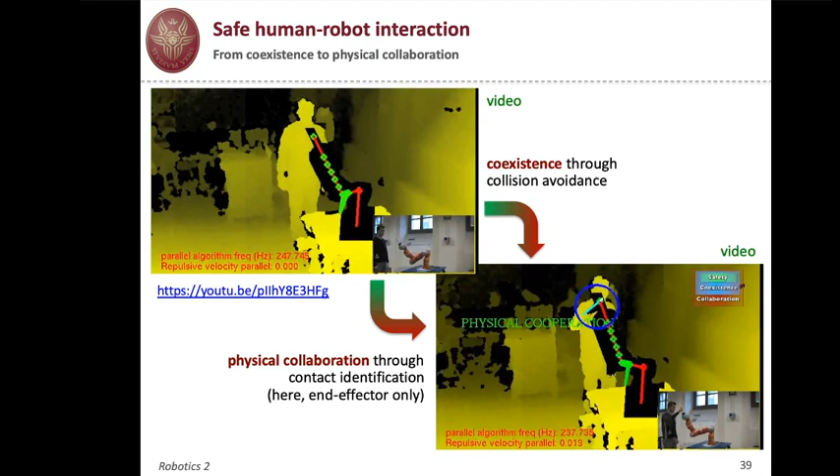As a matter of recap, let's look at these two short clips, which are taken from the IROS 2013 video. On the first one, we have the coexistence, so that we have no contact at all between the robot and the human. And coexistence means that we are able to achieve collision avoidance no matter how close we are to the robot. In the second video, instead, we have an explicit contact and we exchange forces at the end effector level.

We will see that in order to perform a useful collaboration, we have to identify the contact location and also estimate the force that occurs at the interaction point. So our goal in this second part of this lecture will be going through, first, detailing how the distance computation is done, and in particular, how this can be brought to the localization of the contact point.

So this is the procedure that has been made so far already. We start with a single depth image acquired by Kinect. We have seen that we can also use two depth images for a better collision avoidance, avoiding false obstacles and occlusion. But anyway, with the depth image, we remove the robot from the image to avoid estimating self-collisions, which are not there. And we do this by applying a special filter, which is freely available by the Technical University of Munich, starting from the CAD model of the robot itself.

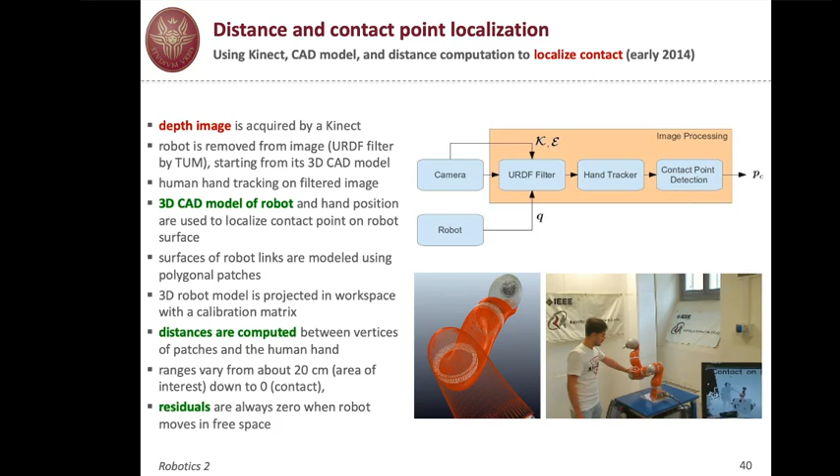And this computation is made from a distance which is about 20 centimeters, so this is the area of interest of proximity to the robot, down to 0 centimeters, which means that we have contact. During this free space motion, of course, the residual signals, those that are used for doing collision detection, will always be equal to 0. And here on the right-hand side, we see a surface patching of a CAD model. We see also the procedure done by the image processing to get the contact point detection.

Now, at this stage, we use internal and external information because we are getting closer, and the contact will be detected when the residual goes out of 0 or overcomes a threshold. At this point, the vertex from the surface of the robot, which is at minimum distance, will be taken as the contact point. And from there on, we can proceed for further estimation.

Now, in this video, you will see the algorithm applied to the left and right hand. They are colored with red and green, respectively, and so far with no other body parts. So you see the real image and the depth image. The left hand of Emanuele is touching close to the end effector, and now again with the left hand around the elbow. And now with the right hand, you see that all this occurs while the robot is moving.

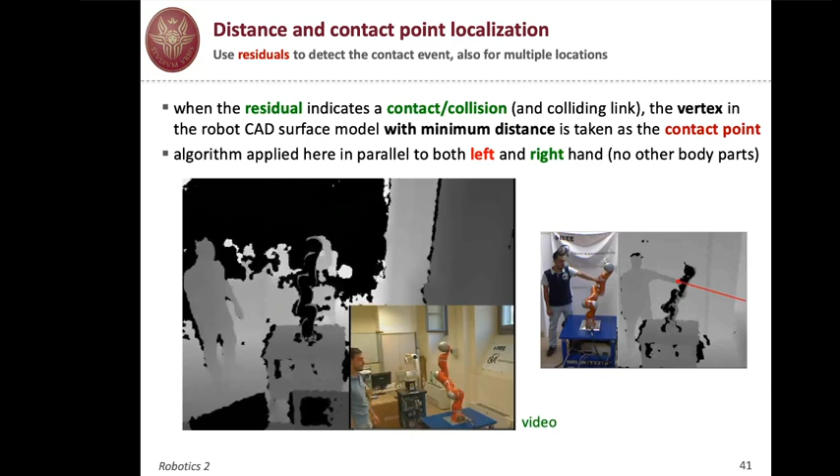So this is the first step. You need to know where you had contact. And in fact, you see that the images appear only when the hand is sufficiently close. Of course, you could do also double contact, and then you trace the hands as long as they remain within the 20 centimeters of distance.

Now, later on, we have also improved this first distance computation, which was limited only to the hands of the human, taking advantage of a framework, the CUDA framework, which is intended for parallel programming, so using GPUs in a massive way. In this case, we work with three depth images, so 2.5 dimensional images. The real one, which is captured by the sensor, in our case, a Kinect. The virtual one, the second figure in this slide, contains only the projection of the CAD model in the depth image. And finally, we do a subtraction, and the filtered depth image contains only obstacles.

At this stage, we can use parallel computation. So we compute distances between all points in the virtual image, so the ones that belong to the robot, and all obstacle points within the region of interest which are present in the filtered image. So we don't limit ourselves to the 2 points representing the hands. Because of this parallel computation, practically we need the same time to localize one contact point or even multiple contact points.

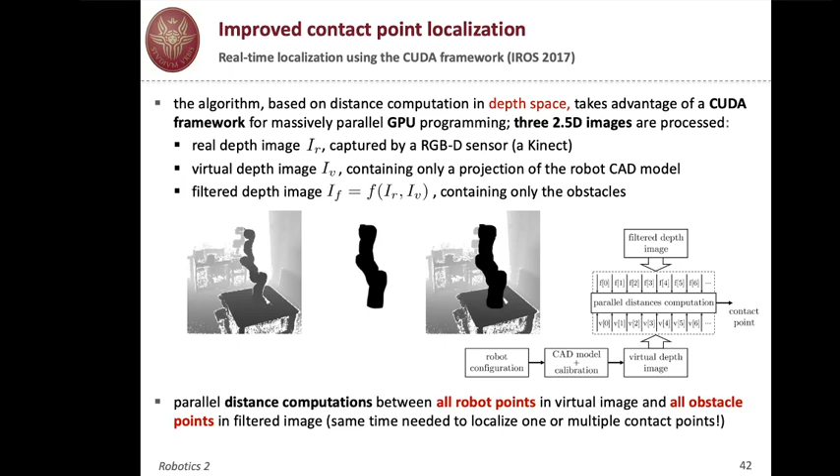But this was a later result. Now, in the first video that you will see, we have worked still with only the human hand contacts. Once you have localized where this contact point is, you may start wondering how you can estimate the contact force at that particular point.

And again, we are combining internal sensing information, or proprioceptive, and elaboration of that. In particular, in our case, we will use the residual vector and the external sensing coming from the monitoring system, in our case, 1 or 2 Kinect. So the task is the one that is realized. We localize in the least invasive way these points where the contact occurs. We give an estimation of the Cartesian forces that are being exchanged, initially probably 0 when we just touch the surface. And then we may use this information to control the robot reacting in some desired behavior.

That depends on the context, indeed. So the idea is to use the residual method to detect that the physical contact occurred. With monitoring the generalized momentum, we can also isolate which was the colliding link, and we have a filtered version of the joint torque associated to the external contact force. So far is what we have learned.

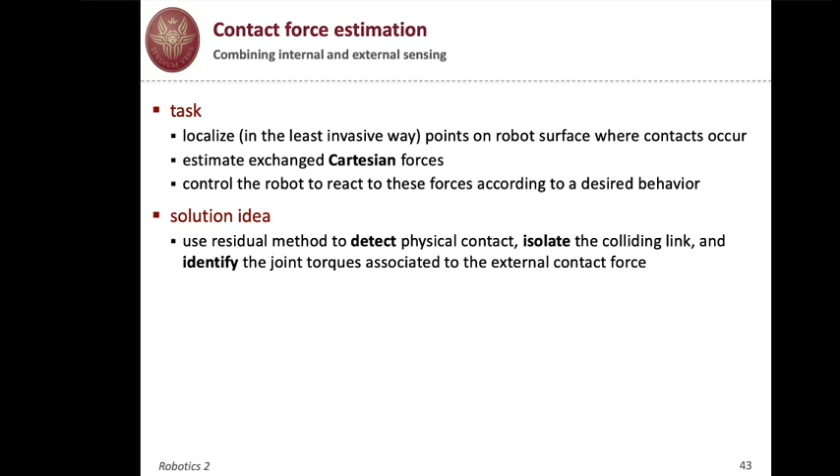Now, we have an additional part which comes from the external sensing. In fact, the depth sensor knows which human parts are in contact with the robot, and moreover, the most important thing, can localize the contact point on the robot structure. If we localize the contact point on the robot structure, then we can also compute analytically the Jacobian of this contact point, or area more in general.

So the estimation of the contact force goes through a simple solution of a linear set of equations, which are built substituting to the static transformation tau equal J transpose of the contact wrench, so forces and moments applied at the contact area, the resulting joint torque with the residual itself. In fact, we know that the residual is a first order filtered version of this. So we have this kind of equivalence. So we solve, in fact, J transpose gamma equal r.

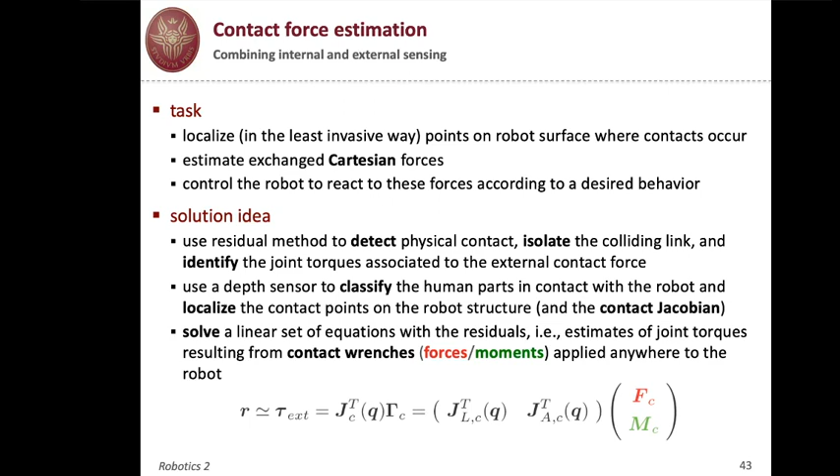Now, gamma is made by a linear force and an angular moment. And the Jacobian can be partitioned into the linear part, the top row of the Jacobian, and the angular part, the bottom row of the Jacobian. Since we are working with the transpose, of course, this becomes the first set of rows, the linear part, and the second set of rows of the transpose, the angular part. This is important to understand because what we will do now is to solve this type of equation. But in fact, this Jacobian may not be square. In fact, for the KUKA, it is a 6x7 matrix, and so the transpose is a 7x6.

But we made some simplifying assumptions, which are very realistic, in fact. When we are dealing with contacts, and in particular single contacts, so there's a single human part, which may be the hand, the finger, or an arm, the elbow, whatever, which goes into contact with the robot body. In this type of contact, which is almost pointwise, there is no transfer of important torque part. So the moment is really limited, okay? So there is a decision to be made. This small amount of moments, are we going to try to identify, to estimate also this part, or we make some simplifying assumption, we remove this from the picture, and then we may have a more reliable estimate of the

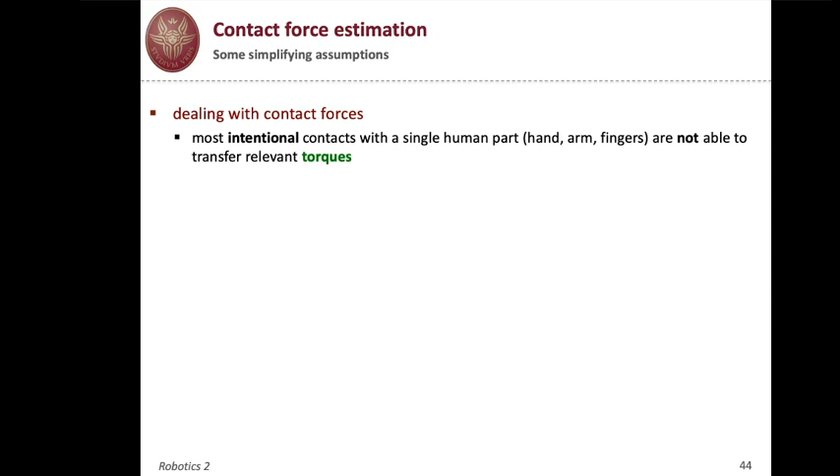contact force only. In fact, in order to get a good estimate of the wrench, gamma C, the Jacobian should have rank 6. So the robot should have at least 6 joints, which is true for the KUKA lightweight, by the way. But the point is that the contact should occur at the 6th or 7th link only. Because otherwise, the Jacobian would have some 0 columns, and therefore it could not reach the full rank required to estimate the full 6-dimensional wrench. So to make things much simpler and also more practical, we assume that there's no moment at the contact. So we consider only estimation of a pure Cartesian force Fc.

And at this stage, we just take the upper part of the Jacobian, so the linear part of the Jacobian, and we transpose this, which is in our case a 3x7 matrix. So the transpose is a 7x3, and we have a non-square matrix in this set of linear equations, and we solve for the estimate of the 3-dimensional force Fc using all information from the residual, which is, in our case, a 7-dimensional vector, okay?

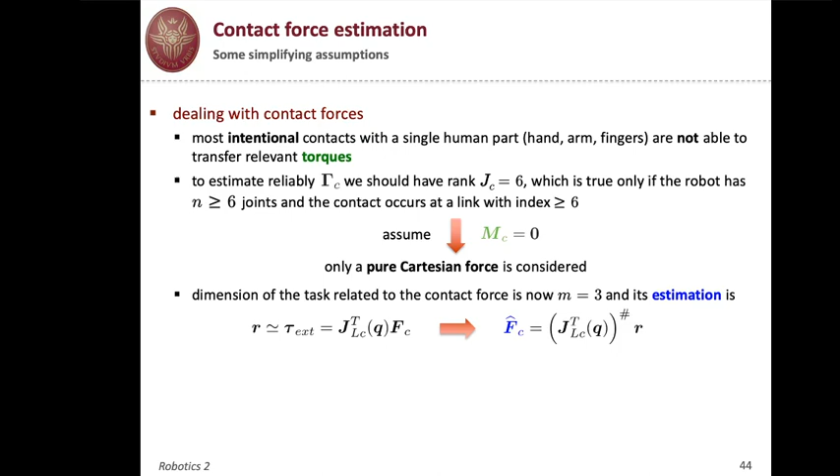So this is a minimum error solution indeed, because we may not have consistency of equations, but we can evaluate the quality of this estimation by making a number of tests. The contact Jacobian indeed is known once we have the information from the depth sensor. So we have all things in place, the residual and the contact Jacobian, to solve this pseudo-inverse and get an estimate f hat of the contact force.

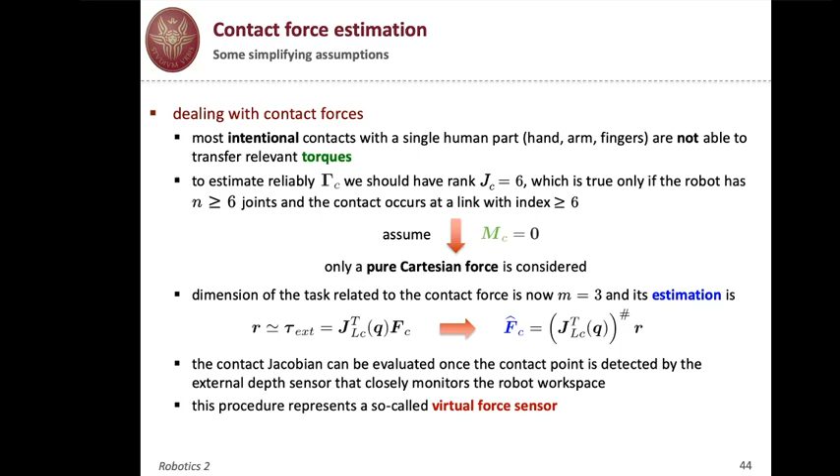Now, this whole procedure, since we have in no place an explicit measurement of this contact force, nor a tactile sensor, nor some force torque sensor in the vicinity, is in fact a pure virtual force sensor. So it's a procedure that replaces a physical sensor. Now, how can we validate what we get as an estimate? So let's consider back the full problem.

So with the Jacobian, which is considering both the linear and angular part, there's a mistake here. In fact, this should be the full wrench, not the pure force. But anyway, let's consider this as a full wrench in the first place, or a pure force when we reduce the estimation to the linear part. So how can you test this? You can use a force device for measuring an object. We decided to use a known mass located in a known position, like you see on the top image, which is now reported here in large.

So we have a known mass appended to the robot in a known position. We multiply the mass by the acceleration of gravity, and this gives the force applied to the structure. Now it's hanging. And we did this hanging it in two different places. So this is a static evaluation of our estimation. So the mass was 1.93 kilogram, which corresponds to a force of minus 18.93, applied either at link 4 in a known position on link 4 or in a known position at link 7.

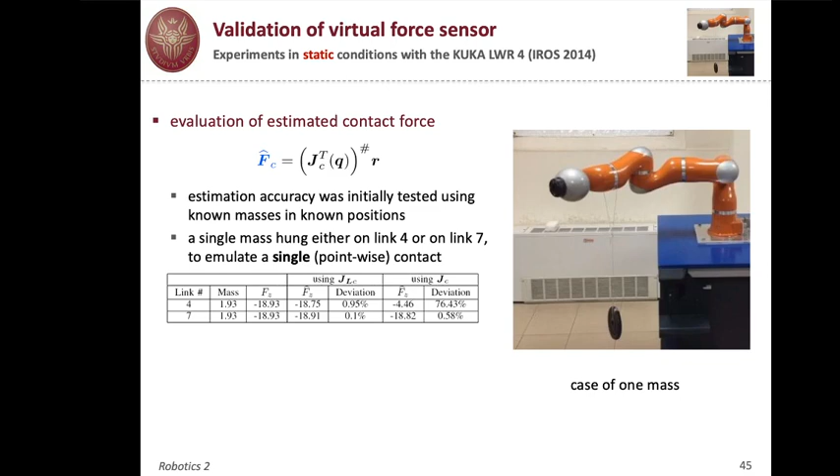We made also a second experiment. So we decided to hang first a mass on link 7 and then a second mass on link 4, so that we have a double contact estimation. And you see that using just the linear Jacobian for the two cases, we have reasonable results with a maximum deviation which is below 2.5%. And in the plot, you can see the evolution of the residual when we apply the first mass on link 7. You can see that there are the residual moving out of zero, and then when at the 5 second we are applying also the second mass, the residual changes further, and you see that the estimation of the force in the 2 points is kind of reliable. When you apply the second mass, in fact, you have also a slight variation of the estimation of the first one, so on link 7.

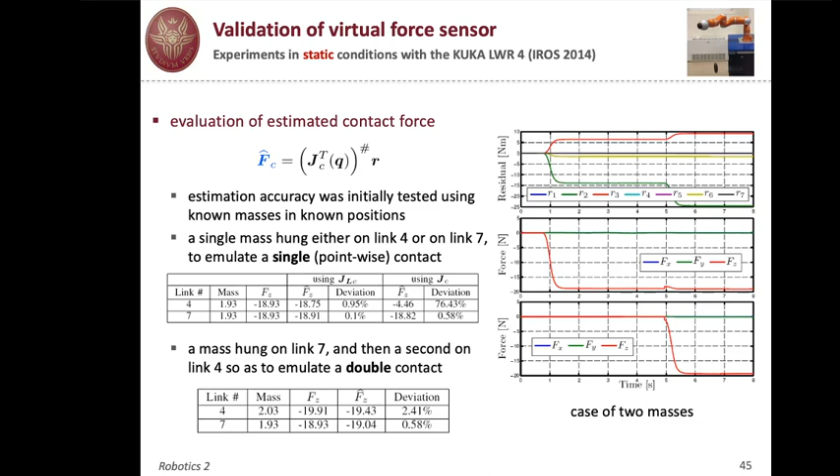But these were quite satisfactory, at least at the level of accuracy which is the one relevant for human-robot interaction. If we have to perform instead a very accurate application of force on some metallic part, then we may need more accuracy, and then we may need also some explicit force torque sensor being used there. But for a human-robot physical interaction, this is fairly accurate. And so putting everything together in this video presented in 2014 at the IROS conference, we can see the actual estimation represented by this red line, which is attached to the contact point. So we have detected the contact point, we use the residual and this pseudo-inverse, and we estimate a force both in direction and in orientation.

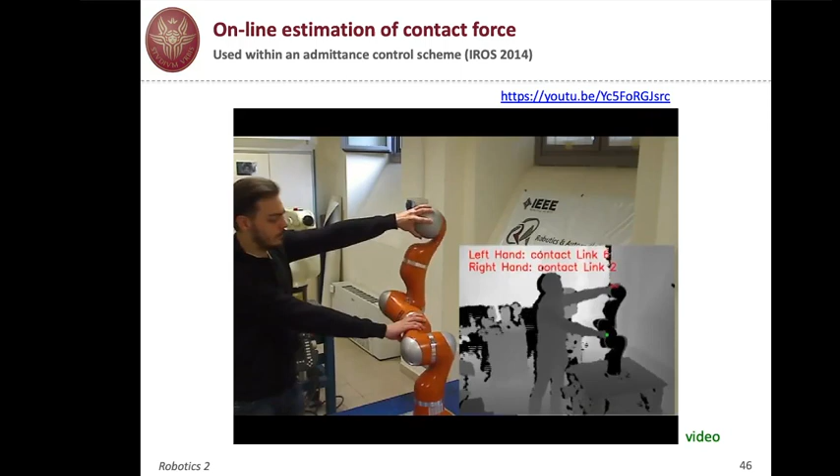In direction and in magnitude. As you have seen, you can also detect multiple contact. Here you see that link 6 and link 2 are in contact with the left hand and the right hand respectively, although in those cases we don't assign an estimate, okay? We give an estimate only when there's only one contact point.

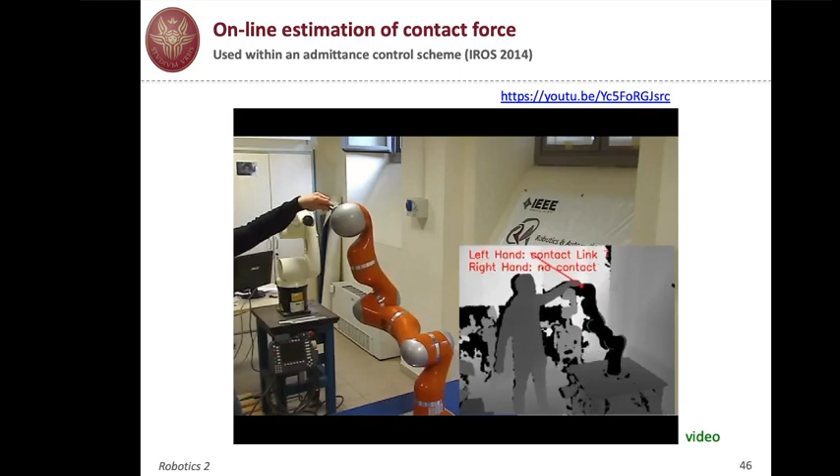And this can be clearly recognized from this video, where you can see on the right hand side the depth image on which we report the results. Okay, so this was used, and by the way, here you can see the actual behavior. The robot, once you apply this force, reacts in this case with an admittance control scheme. So it generates by and large a velocity in the direction of the estimated force.

Okay. Now, in this part of the experiment, we assign stiff behavior through this admittance control scheme. So when at some instant of time the human pushes, in particular, these are plots that refer to the contact at the robot link number 3, then since the admittance control has a large stiffness, in order to move the robot out of this configuration, a large force has to be applied by the human. Okay, but anyway, when the contact is removed, so when the hand is removed, the contact point returns to its initial position according to the admittance control scheme.

So you see that the residual grows, the force estimated grows in the 3 components. The residuals, in particular, the residual of joint 1, 2, and 3 are different from 0, while from 4 to 7 are 0. In fact, this is a contact at link 3, and the theory tells us that all the residuals associated to the joints beyond the link in contact should remain 0, and this is in fact what happens. So with this residual and with the pseudo-inverse of the Jacobian of the contact point, which has been identified by the depth sensing procedure and the distance calculation, we estimate the 3 components x, y, and z of the contact force.

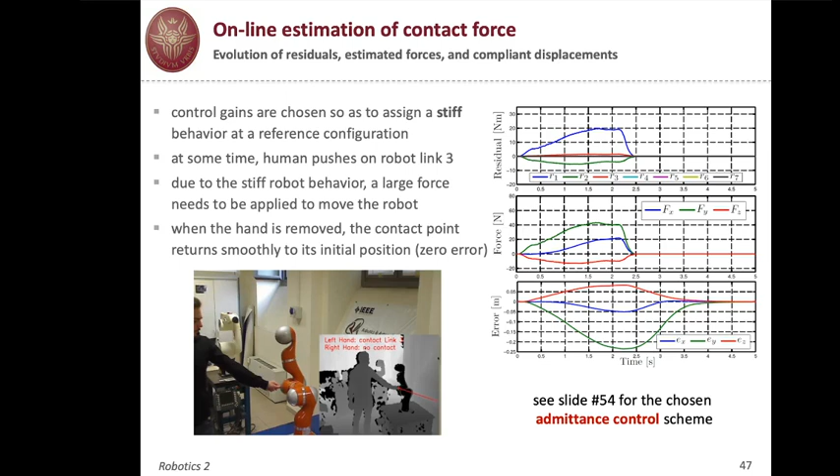Okay, now later on, quite a few years later, in February of 2019, we succeeded in doing also a dynamic validation of the virtual force sensor procedure. In fact, we decided to use a force sensor carried by the human, or, as we'll see later on, also mounted on the end effector of the robot. But since we were interested in touching the robot at any point, we had to hold the force sensor in our hand. And there are two videos in this slide

which estimate the contact force measure, first in static condition, but now in a direction which is different from the one of gravity. So while the human is pushing against the robot, and the second video is instead a collision with the robot in motion, an experiment that lets us show how the estimation works even in very dynamic conditions.

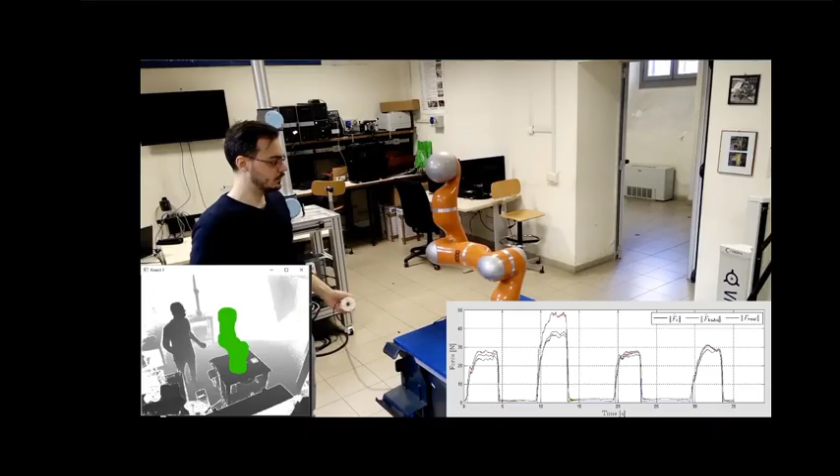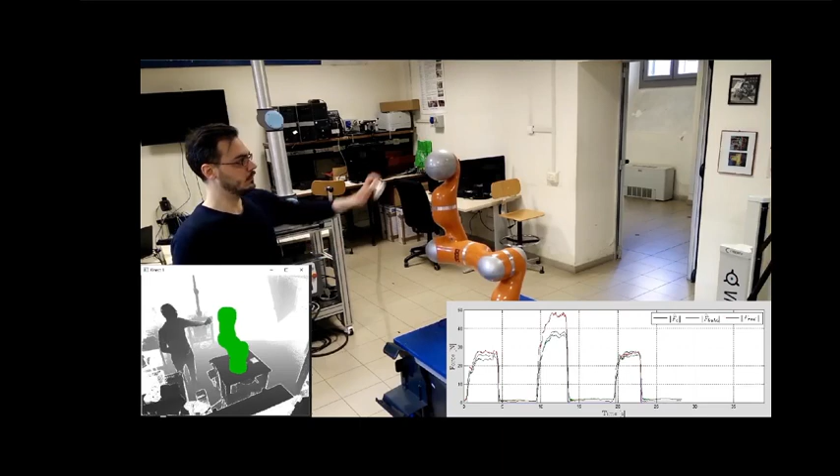So in this first validation, using the admittance control scheme, we are pushing in one point. You see that the estimate from the procedure and the value from the measurement are equal. Here there's a slight change that we will comment on. And the third plot here is in fact the one coming from the joint torque sensor of Kuka, which is pretty much aligned with what we were measuring, and same for this other type of contact.

Now let's comment first on the second peak, which is different between the force torque sensor and the residual estimation. What is missing here, we know this already, is a component of the applied force which will produce no work on the joint coordinates. This part is completely lost in the residual, so even if you start from the residual to estimate the full force, you will never recover that part. In the other contact, you see that this component is negligible. In the second video, we will see a collision.

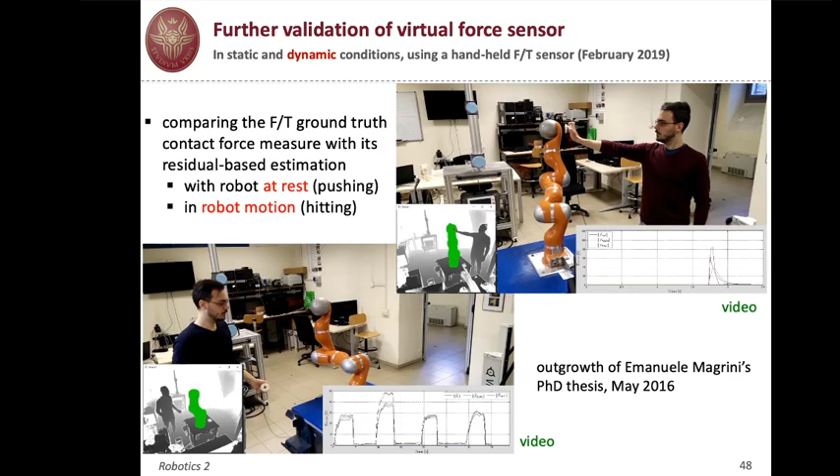And now slowing down motion. And you see that the approximate estimation is relatively good also in this case. Remember that the residual is always a filtered version, so if the collision is high, there's some delay in estimating the contact. So if the contact is removed immediately, then all the signals will go back to zero in a similar way. Okay, so this allowed us to make a validation of our virtual force sensor, so our estimate of the contact force.

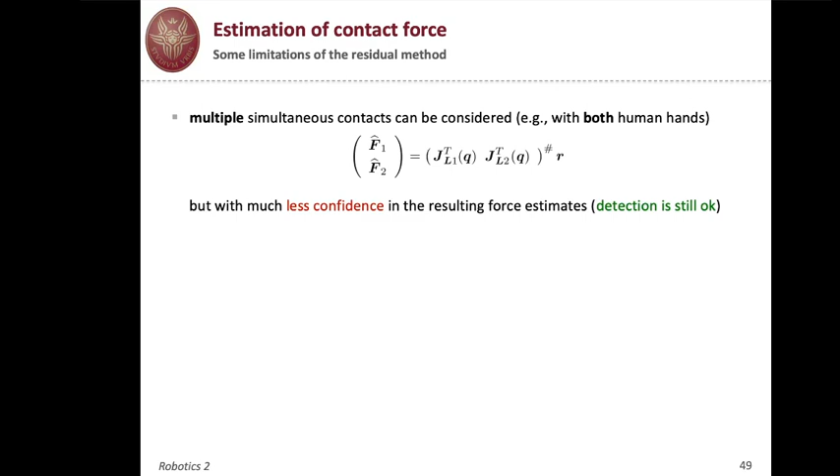Now let's make some comments. First of all, what about simultaneous multiple contacts? If, for instance, you have seen in the video when we were touching with both human hands, we don't report, the method could be applied as well. In fact, there's a Jacobian for one contact point and a Jacobian for the second contact point. The residual is always a 7-dimensional vector in our case, and we are trying to extract information on the two contact forces. However, this is much less confident. So while it's good for achieving detection, it's not really good for making an estimate of the single individual forces at the two contact points.

The second comment is exactly what I was saying before. Remember that the estimates will be based only on those components of the contact force that are detected by the residual, and in particular those that produce work on motion. In particular, all contact forces that are in the null space of the Jacobian transpose will never be recovered. In fact, they are balanced by the reaction of the structure, so they are not producing any motion. For instance, in this three-link case, if you have a force applied at the end of the first link, F1, the red arrow, this can be decomposed in two parts, one normal to the first link and another along the first link. This is being balanced by the internal forces of the structure. So the only thing that you can estimate is the component normal to the link. So the F hat 1 is the blue arrow that you see.

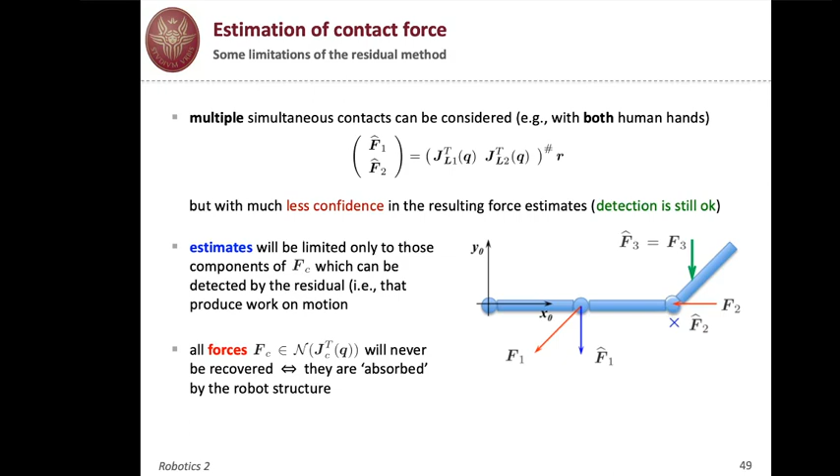Even more critical, if you're pushing in this singular configuration for the sub-robot made by the first and second link, so if you're pushing like F2 in the direction of the two joints, of course, this will produce no joint torque at all. So the estimation will just give a zero value from the residual, which is in fact also zero. While in the green arrow case, with this force applied to the third link, you will get the full information. In fact, you're also using more residuals in this case because you have a non-zero value of residual 1, 2, and joint 3. In fact, this can be brought farther. The number of residuals is quite critical.

And you can show that if you imagine that only pure contact forces are applied to the structure, so no moments, like we said before, and if you're hitting sufficiently down in the open kinematic chain, so you have at least 6 residuals available, so for instance, for the KUKA lightweight robot, you're hitting on the 6th link or on the 7th link, which is the end effector, then in order to estimate the contact force, you don't need any external sensing from a Kinect that tells you where the contact point is, because you're able to identify the line of action of the force, like in this picture.

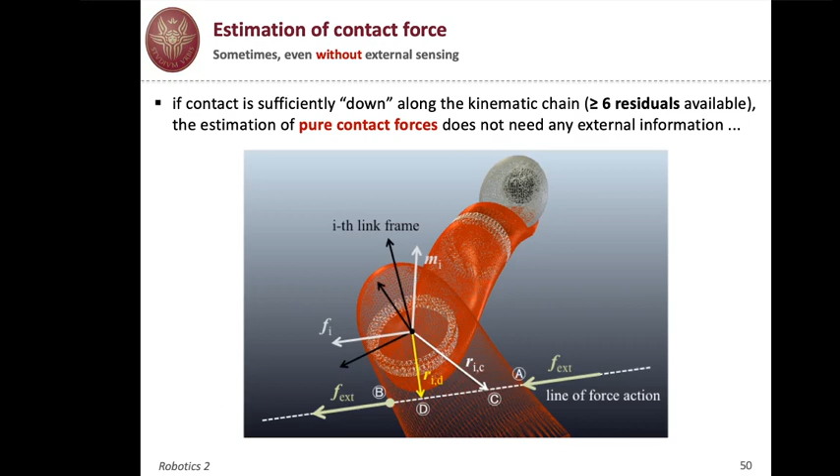The details are in a paper by us, but in any case, the only remaining uncertainty is if your force is the one pushing on point A or pulling the arm on point B, because you can identify the line of action of the force, and making the intersection with the CAD model of the robot, you have the possible point of contact. Indeed, many times you're pushing rather than pulling in one point. So in these cases, you exploit the fact that you have a sufficient number of independent pieces of information contained in the residual vector. And from there, you can identify both the contact point and the direction and intensity of the contact force.

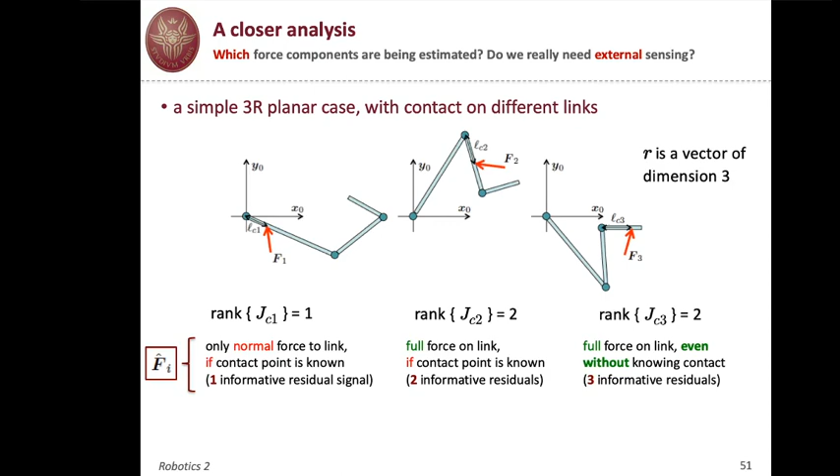But since we have now all three components of the residual vector being different from 0, with this three pieces of information and some elaboration, you can really understand also where the contact point is, and this is the third missing information. The fact that you're contacting link 3 is just because the three residuals are all different from 0, and this is the only case where this happens. So with this informative residual, you can estimate both the X and Y components of the applied force F3 and also the contact point. In fact, you estimate the contact point and then you can estimate the value of the two components of the force.

Indeed, if the force lies in the null space of the Jacobian transpose, no matter if you know or you don't know the contact, then this component will never be recovered because it will never excite the residual, which remains at 0.

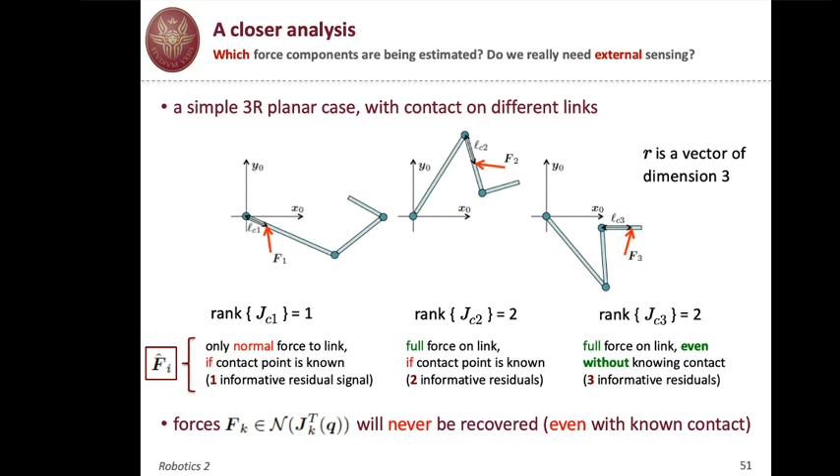Another variation on the subject, and this is the last one, is a work that we did in 2016, in collaboration with KUKA. One of our PhD students, Gabriele Buondonno, spent a month in Augsburg working on their Agilus robot. And they had this idea of mounting a force-torque sensor at the base of the robot, as in this picture.

Now, force-torque sensors of moderate size are typically mounted on the last flange, on the wrist of the robot. And in fact, they can measure whatever contact occurs beyond the sensor, so at the level of the gripper or the tool and at the contact with the environment occurring there. If you push the robot before the force-torque sensor, nothing happens. So with this simple observation, if you move the force-torque sensor really to the base, then everything else will be beyond it, although it will not be a single rigid body, but an articulated body.

Okay. So the idea is, can we use this measurement to get information on the contact location and on the contact force, and possibly also on the contact moment, working with the full wrench of the system? The answer is yes, and in particular, we can have also a combination of the use of the residual plus the force-torque sensor measurement at the base.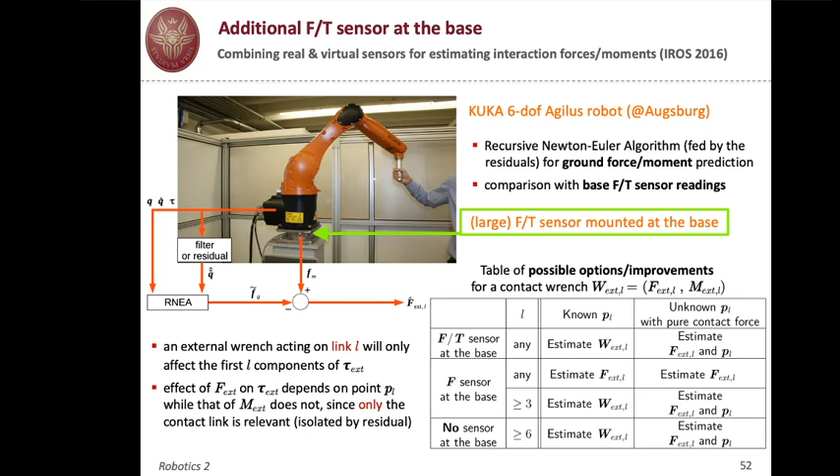Okay, so this concludes the part related to contact force estimation. And now that we have an estimation of the contact force, we should decide what to do with it for controlling the motion of the robot, especially if you want to collaborate. So the first question that you have to understand is whether this contact was an accidental collision, so a hard collision, or an intentional contact, which is soft, which signifies in our interpretation that we would like to collaborate with the robot.

In order to make this distinction, so distinguishing hard from soft contact, like we did with motor current measurement on the Kuka KR5, we can also do a filtering on the residuals. In fact, we can build a low bandwidth residual and a high bandwidth residual. And of course, the high bandwidth will see all possible types of contact, while the low bandwidth will fail to see the high frequency component of an accidental hard contact.

So the behavior is clear from the video, and then we will comment also on the plot. So in this case, there's a hard contact because this was completely unintentional, and the robot stops and is being removed and then resumes operation after a while.

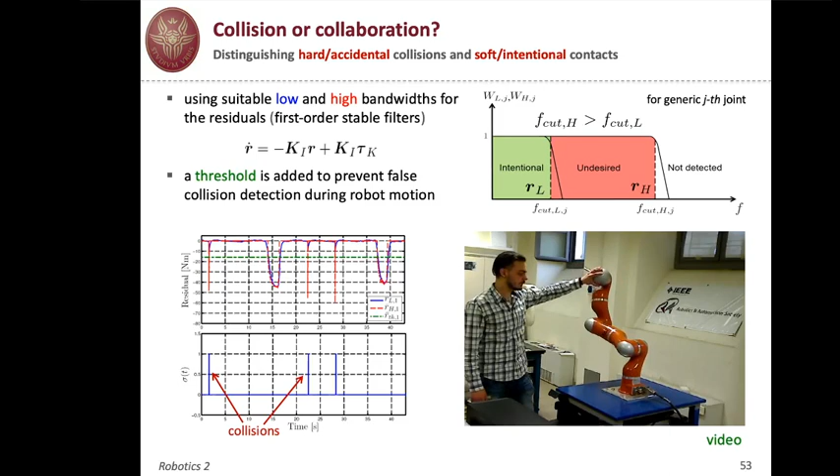Now on the left-hand side, you see plots, and in particular, you see that when there are high peaks in the high bandwidth residual, the red one in the first plot, then this is classified as a collision. So this sigma is a 0,1 value. And you see that the red peak not followed by the blue residual, which is the residual at joint 1 with low pass, with low bandwidth, these are being classified as

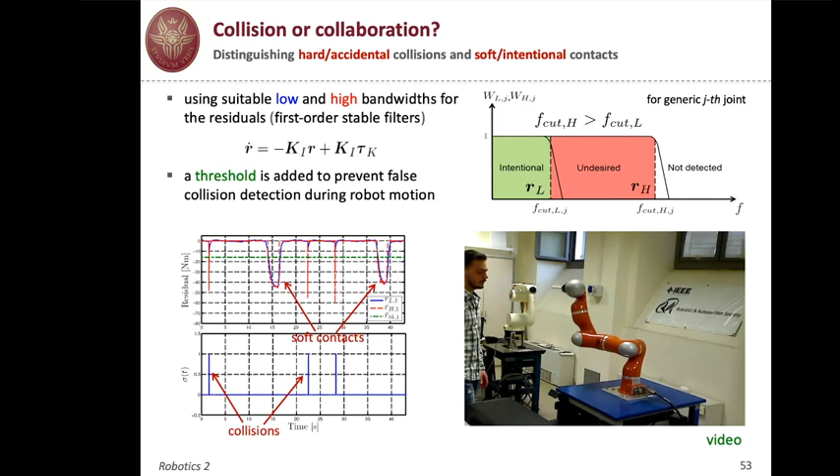collisions. On the other hand, when both residuals grow above some threshold, which is always included to prevent false detection because of noise and uncertainty and so on. So when there is a soft contact, of course, both the low bandwidth and the high bandwidth filter will be excited. And in fact, you recognize that this was a soft contact in this case. Okay, so you can start collaborating like we have seen in the video.

Now, what do you want to do for collaboration? So how do you want to use the estimate of the external contact force for doing some robot control? In particular, you want to shape the dynamic behavior of the robot depending on which type of collaborative task you're doing with the human. For instance, if you want to carry in common a heavy payload, or you would like to contribute with the robot to hold a part in place and then move it around, or if you want to do whole arm manipulation, so having contact with a large object with several parts of your body and with several parts of the body of the robot, and so on and so on. Of course, the context is important, but we built some basic bricks that can be used in the various contexts.

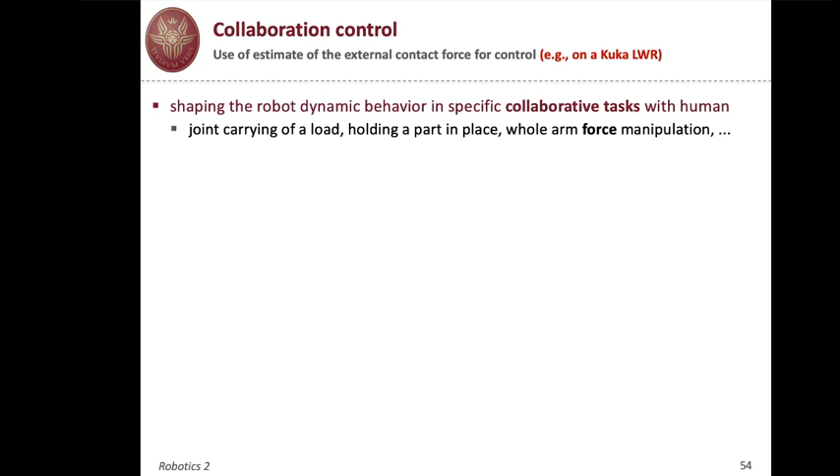So in particular on the KUKA lightweight, we can control motion by commanding either kinematic quantities or dynamic quantities. On the KUKA, this is associated to two modalities of the fast research interface, which is the interface for a generic advanced user that would like to design their own control law. So in the velocity mode, you can command velocities, of course, and the KUKA robot controller will realize them. How do you command this velocity? You use an admittance control law like we have seen before. So you convert the estimate of your force into a velocity that should be realized by the low-level controller.

Instead, if you are able to enter current or directly command torques, like in the torque control mode of the fast research interface of the KUKA, then you can implement other schemes like impedance control, or even hybrid force motion control, or even just pure force control in torque mode. And the new thing with respect to what we have seen so far, so controllers that work in the joint space or in the Cartesian space or in the task space, well, this may be classified as a generalized task space, and the task space is in fact the contact point. So at the contact point, you can associate a frame, and then you can decide what to do with your estimation of the force.

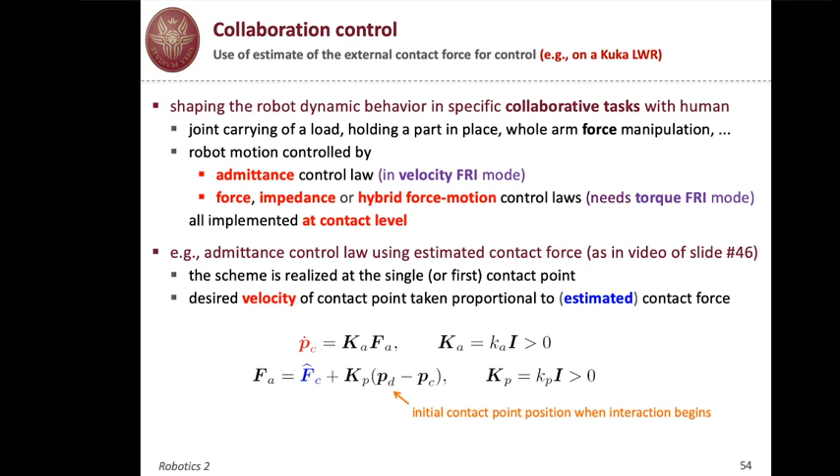So let's see, in the first place, a simple example where we are only controlling force in one direction. Okay, and we are doing this in the torque control mode for the robot itself. So you see, this has been used also for the presentation trailer of ICRA 2015, where our paper got finalist, although not winning the best paper award, but it was well considered.

So here you see what happens. Emanuele is pushing, and you see the force is being regulated at around 15 Newton. And of course, regulating force does not mean that we are regulating position at all, because if you're pushing less than the 15 Newton, then the robot will come against you in order to increase the contact force.

If you're pushing too hard, so more than 15 Newton, then the robot will recede and try to reduce the pressure by moving back. So there will be some motion, which is the result of trying to regulate the contact force at a certain level. In fact, we are regulating not the true contact force, we are regulating the estimated contact force to get to a desired value. And this is why we were interested before in assessing how good was our estimate of the real contact force.

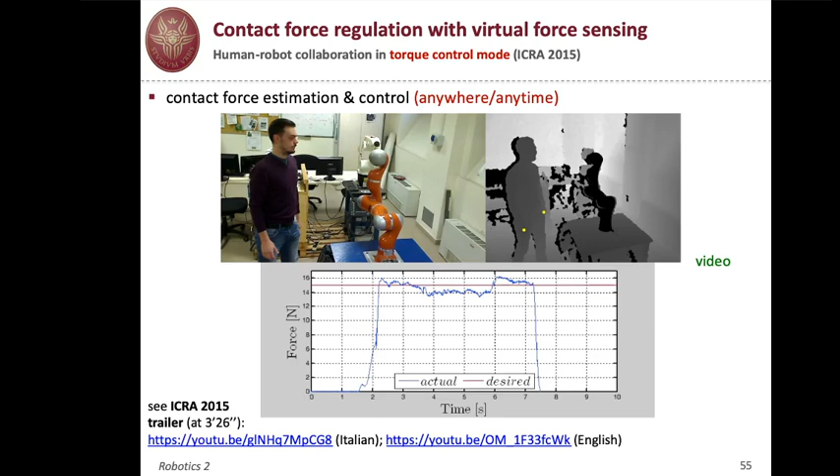Another control method that we have applied is impedance control, impedance-based control of the interaction. The main novelty is that we do impedance control at the contact point. So in order to understand what's going on, I'm using here these simple sketches to understand what are the differences of impedance-based control at the interaction point.

So if you have a simple controller which imposes a joint compliance, which means that each joint has a torque controlled with a PD control of some reference position. Suppose that we have to keep the position shown in the picture. At each joint we have an equivalent spring and damper attached to the desired configuration. When you're pushing the robot link or the robot body at any point, you're trying to move the structure out of the reference position for the joint compliance controller, and then you will react. So you don't need special things in this case.

If you impose a Cartesian compliance, then you do the same, not at the joint level, but at the end effector level. So if you're applying a force on any link, you will tend to move the structure and therefore also the end effector from its equilibrium, and then you will have a reaction accordingly. However, impedance control is more than that, because you're trying to modify the apparent mass or inertia. And you can do this in two ways.

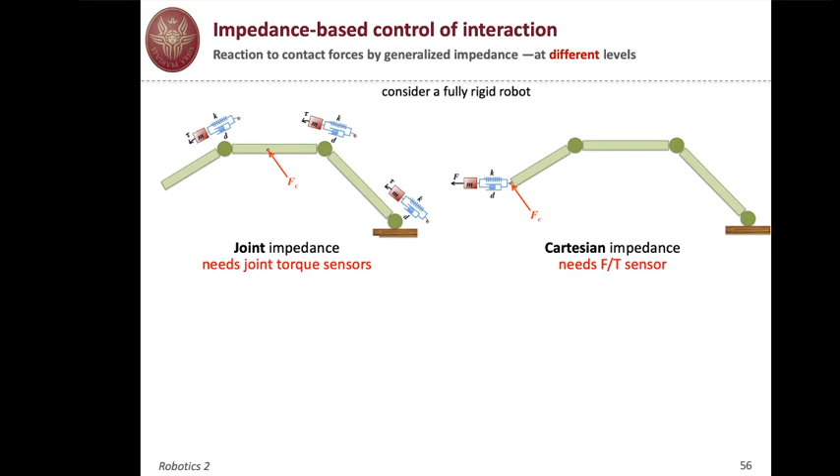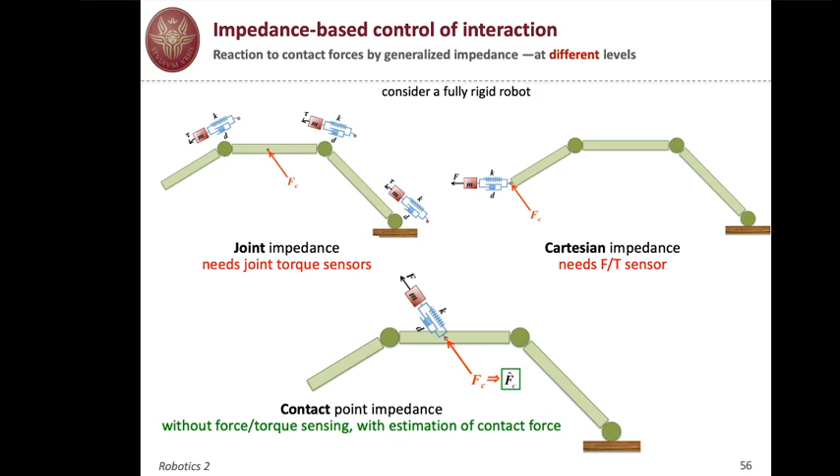In our case, we have the following situation. We can impose an arbitrary inertia at the contact point together with the stiffness and the damper, and this is done exactly at the contact point where we have estimated the force. So with the estimation of the force rather than the true force, we can implement a full impedance scheme. And here are a couple of videos that show this type of situation.

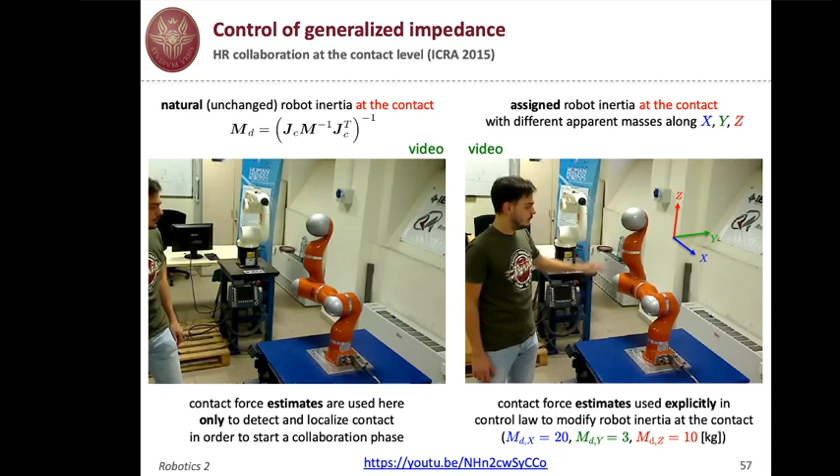On the right-hand side, instead, you see that we have changed one of the parameters, in particular the robot inertia at the contact, in the various directions, having more mass along the x direction, an intermediate mass along the z direction, and a very small mass along the y direction. So if you're pushing in the x direction, you will have a reaction with a given stiffness and damping, but with a large inertia, while the behavior in the other direction is different because of the choice of the apparent inertia.

Okay, now let me stop this video for a moment. Here again, a contact force regulation.

Yeah, so in this case, we would like to regulate the contact force by using an equivalent impedance scheme, as we have seen. So we assign a desired inertia, we assign also a damping term, and then we let this react with respect to a stiffness term, which is proportional to the error between the desired force and the contact force. So this scheme will bring the estimated contact force to the desired value.

And it's written apparently as a multidimensional case, but in this video that I have stopped, we have a situation in which we are imposing a non-zero force only in one direction, the y-green direction as shown by the frame on the video. So this means that if you're pushing too little, the robot will come against you, and if you're pushing too much, it will go a little bit back until it regulates to 15 Newton. In the other direction, there's no desired force and no force applied either, so nothing will happen.

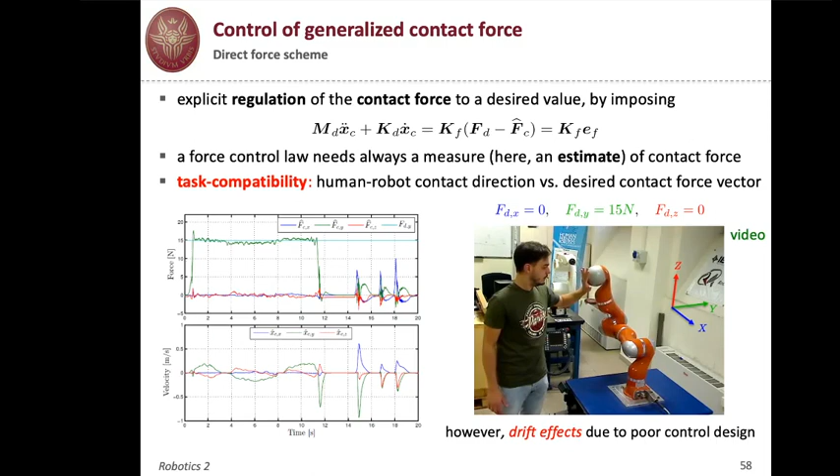And this is what happens in the first phase. And you can see in the plots that the force in the green direction, which is the y direction, is being regulated to 15 Newton. But what happened later? So let's see the video now. I hope it works now. So we are pushing, but still the force is always regulated to 15 Newton. Now, if we push in a different direction, you see that something strange happens.

Okay, and these are the three peaks that you see in the plots on the other side. Why is that? You have a kind of a drift effect because the controller has been set in the wrong way along this direction. Because if you're now pushing in the x direction and your reference is zero, of course the robot will go back in order to bring the contact force to zero. And same along the z direction. But what happens along the y direction? There's no force being applied, although the robot is seeking 15 Newton of contact force. So if you're not pushing in the y direction, the robot will accelerate against you, trying to find the 15 Newton of regulation.

So you have a problem of task incompatibility. It's like in the hybrid force velocity control, you're trying to regulate a force in a direction where there is nothing that opposes this force, or no reaction by the human. And this is why the robot accelerates in that direction, giving this drift effect, which may be also very difficult. So, reasoning about this experiment, we realized that in fact you can design the force control in that way, but not in any generic direction. You can only regulate force in the direction where you're pushing, because you're representing a task consistent environment for the robot in that case.

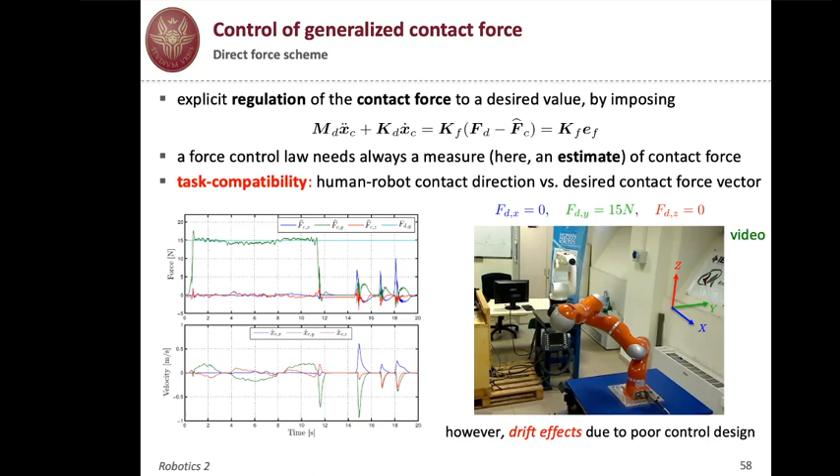And we call this task compatibility, and we described this in our paper at ICRA in 2015. So, in fact, the statement is the following: only the norm of the desired contact force is controlled, so a scalar value, and it is imposed only in the direction of the estimated contact force. And here you see the plots of the experiment, where the force is always being regulated in norm to that 15 Newton value, but in fact the direction changes depending on where you're pushing. So the method that we have developed for contact force identification estimates the direction and the intensity, and only in that direction will regulation of the intensity be achieved.

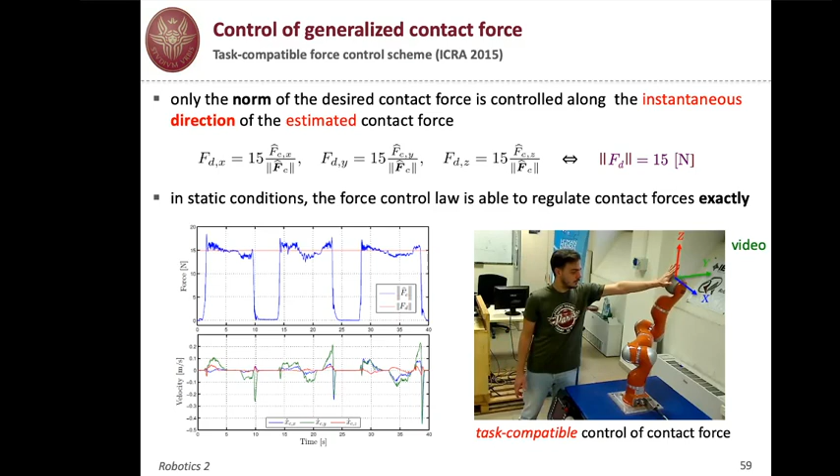So here you see the implementation. So Emanuele is pushing in some direction. It's not relevant which, but in that direction where he's pushing, the robot is reacting with 15 Newton until it regulates this value. Now we're pushing in another direction, at another contact point. Now the 15 Newton are being regulated in the direction of pushing, even if this is time varying, and at the value of 15 Newton here, as we chose this value. And you see that you can push also along the X direction, the Y direction, whatever. I mean, it's irrelevant in this case.

So this was rather obvious, but unexpected at the beginning. No? So reasoning about task compatibility for a hybrid interaction with an environment was pretty clear, but with the human, I mean, it should be elaborated through these results.

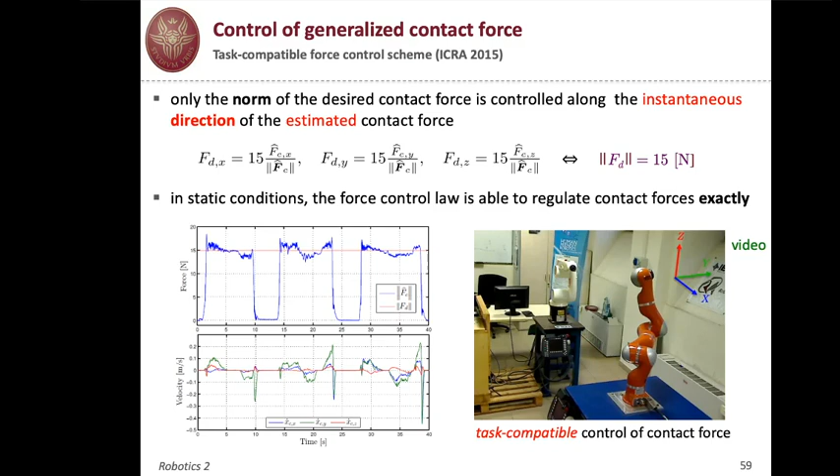Okay, what else? Well, we have regulated force. What happens in the normal plane to where we are regulating force? Well, it is obvious that as we have generalized impedance control or admittance control at the contact point, or force control in this way, we can also generalize the hybrid force velocity control scheme.

So, like shown in the picture, we are assuming a pure force being applied. We estimate this direction, we call this W, and we can build a plane with two other axes, U and V, on this plane, which is orthogonal to the direction of estimated contact force. So we can define really a task frame at this level, in which the z-axis will be aligned with the estimated force, and it's normalized by the norm because the z-axis is a unit vector. And then we can make some computation to generate also two other axes which are on the plane orthogonal to the contact force being applied.

Now the controller, here I'm giving just few formulas. It goes through feedback linearization at the joint level. So you see that we are canceling with n all the Coriolis, centrifugal, and gravity terms. We are canceling the estimated force because we don't have a force torque sensor to measure this contact force. And through the depth sensor, we have also identified the contact point, and therefore also the contact Jacobian J of C, and then we pre-multiply a new command, the acceleration command A, by the inertia matrix. So we are linearizing the behavior at the joint level.

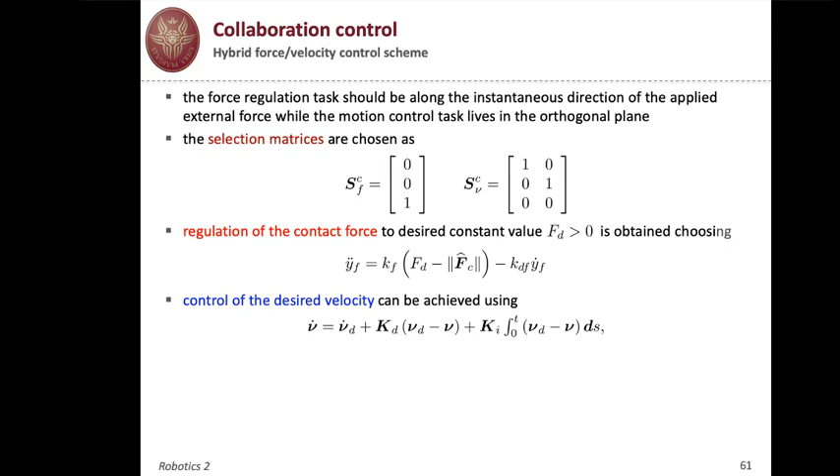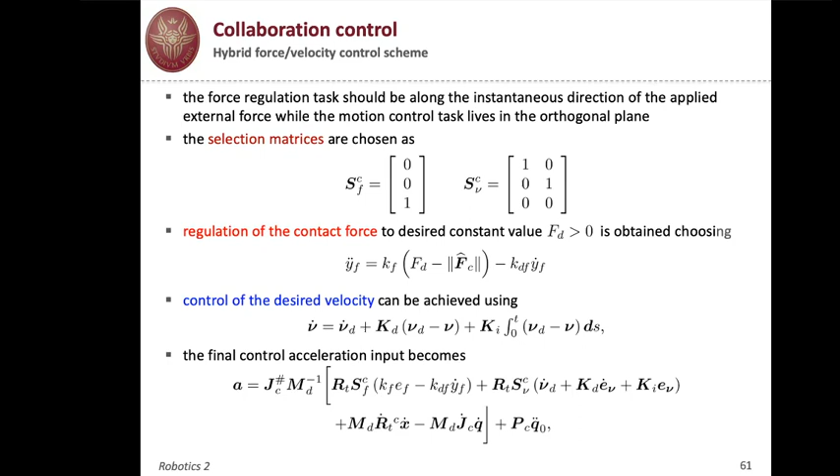In the plane orthogonal to the direction controlled in force, we can impose a desired velocity, which contains a desired acceleration, a proportional term to the velocity error, and a proportional term to the integral of the velocity error, which is in fact a position controller. If we substitute all this into the previous equation, we obtain this final formula.

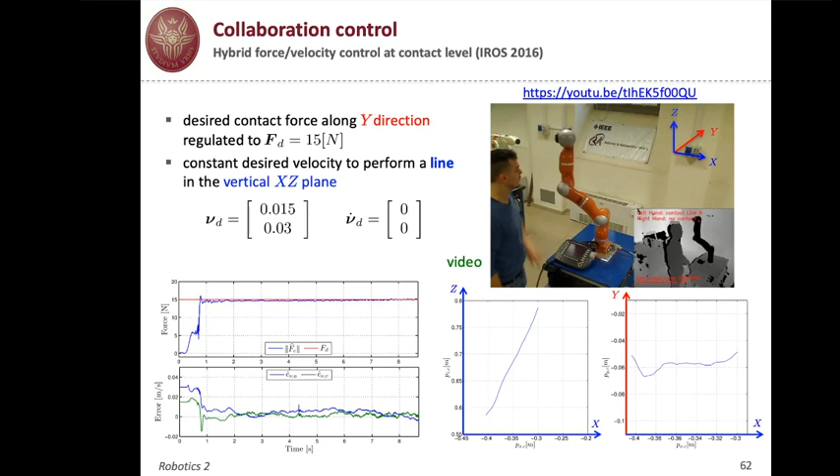Okay, this is the frame. Now you see that the hand is moving on a plane XZ while applying forces, and then the force is being removed at the end. So you can do hybrid force velocity control. This is even more clear as an example.

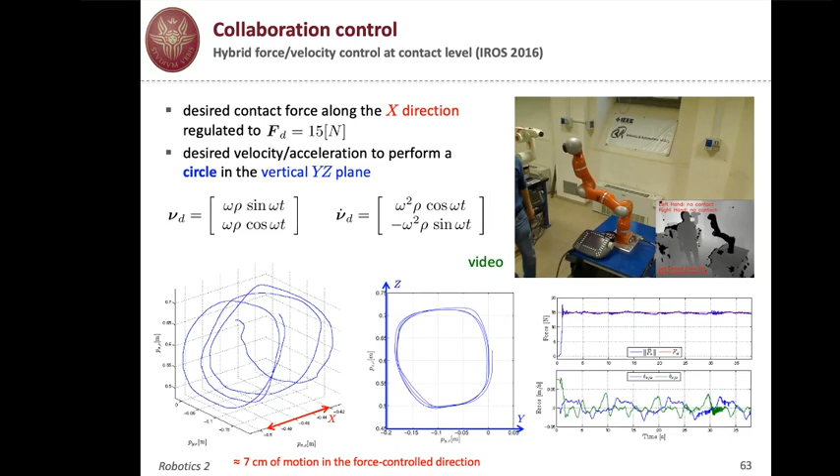And even for these cases, all these methods claim to regulate force or to execute a trajectory in the Cartesian space. In this case, we had to make some further validation when using an extra force torque sensor, like we did for the estimation of the contact force. We do it for the regulation of contact force by control. So the first video is regulation of the contact force in the direction of the estimated contact. And now Emanuele is using a force torque sensor that gives us the ground truth.

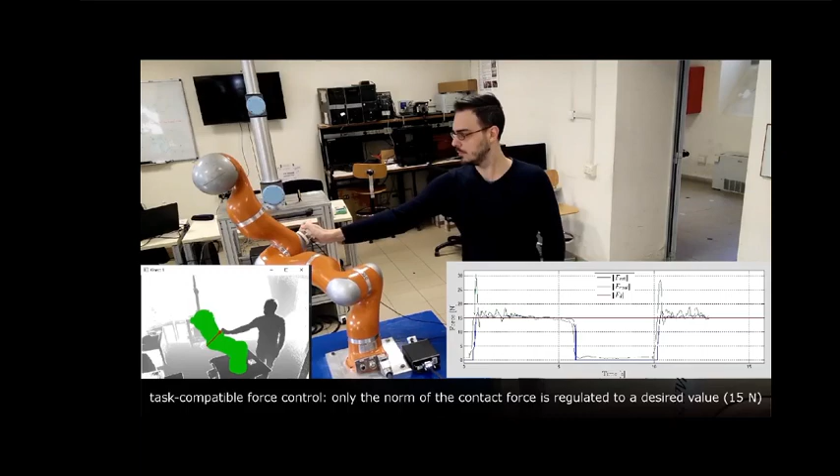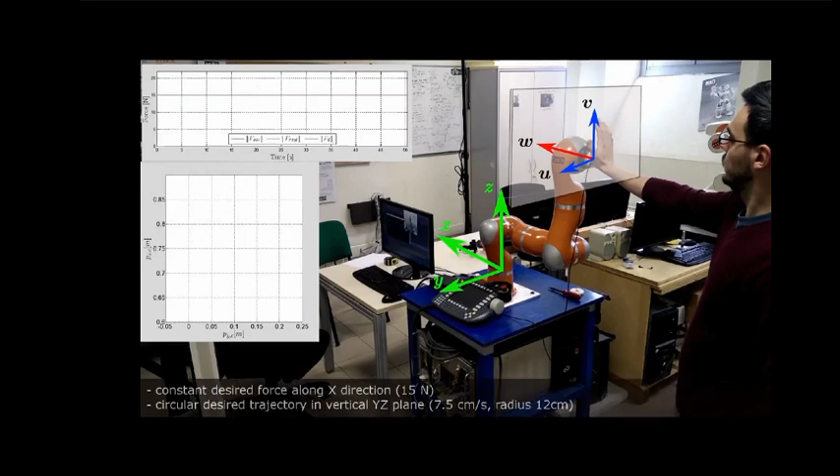And you can apply this at any point along the structure. And you see that there's a kind of similar behavior like you were expecting. The second video is related to the execution of a circular trajectory with constant speed on the normal plane to the direction where we are regulating force to 15 Newton. Here are the definition of the frame. So along the X direction, we would like to impose 15 Newton, and the circle is being executed at 7.5 centimeters per second, and it has a radius of 12 centimeters.

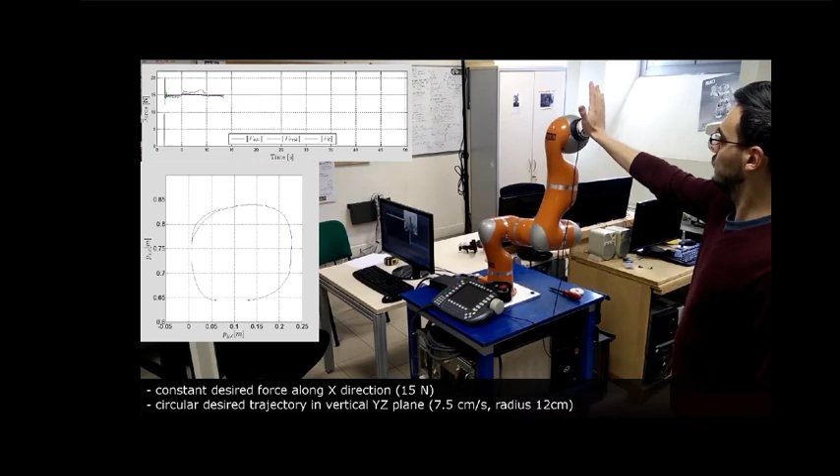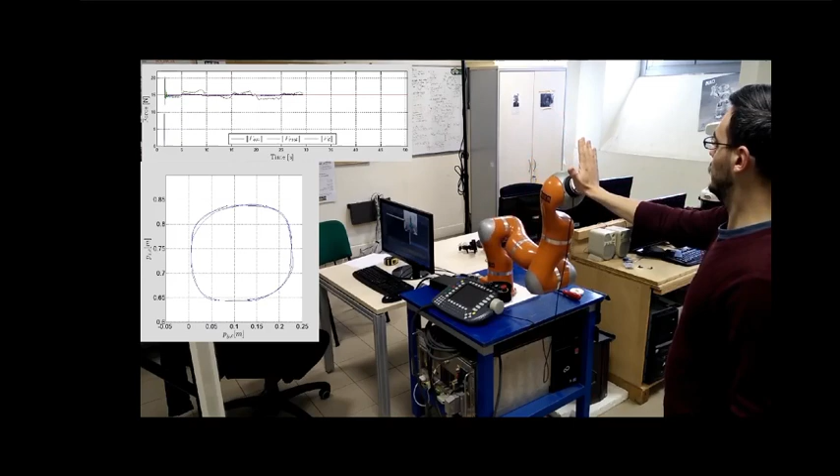You see that in this case, the force torque sensor has been mounted on the flange, but it's between the human hand and the robot.

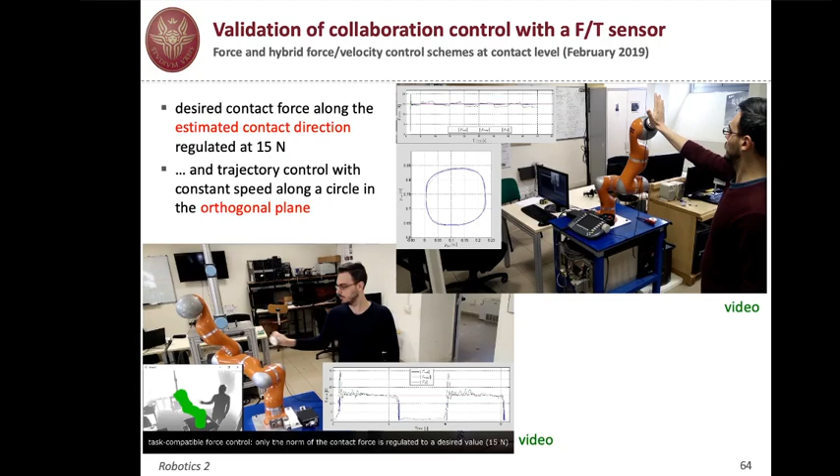Okay, so this concludes our inner research. We have implemented some of these ideas still in the SYMPLEXITY project on a different cell. There was a second cell intended for laser polishing. Now you can see in these schematics the laser polishing machine. Of course, you cannot enter into this machine, and it's very dangerous. It's completely closed. So the operation of laser polishing does not involve any human-robot collaboration.

However, I didn't know this in advance. In order to apply this very sophisticated polishing technique, the original part should be already good enough, because if you start doing polishing on a very bad part, this is not the best way of doing. So this means that outside the laser polishing machine, but still inside the cell, there's a manual polishing station, and there's a laser device that evaluates the quality of the object. And if the quality is good enough, then the robot will bring the part directly to the laser polishing machine. Otherwise, it will hold the part and expose it to the human operator, and the human operator will do manual polishing or checking of things locally. Okay, and in this manual polishing, there will be a human-robot physical collaboration.

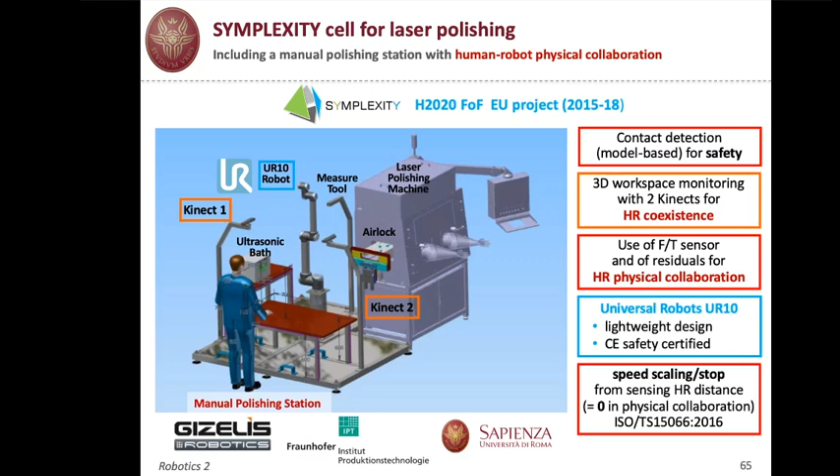Then this distance should go back down to 0, and then the robot should move accordingly to the exchanged force. So here we can see the full operation, the various parts, the various phases. So we start with the measuring of the part. The part is very small. It's part of an artificial heart.

It should be very, very well polished. You see, it's being held, has this helicoidal part. It's being held by the robot on a suitable end effector, and it's being brought in the vicinity of the laser measurement device, the coherent wave scattering device. And you see the red light there. Now, this is one part which does not involve collaboration.

On the other side of the cell, there's the laser polishing machine, and of course, the robot should also coordinate with a tray which opens. This is the only point where parts can be placed and then brought inside the laser machine. We have indeed some coexistence as well. So if the robot is moving in its cell, there's also a bath where the object that has been polished manually is being cleaned before bringing it to the laser polishing cell for the final operation.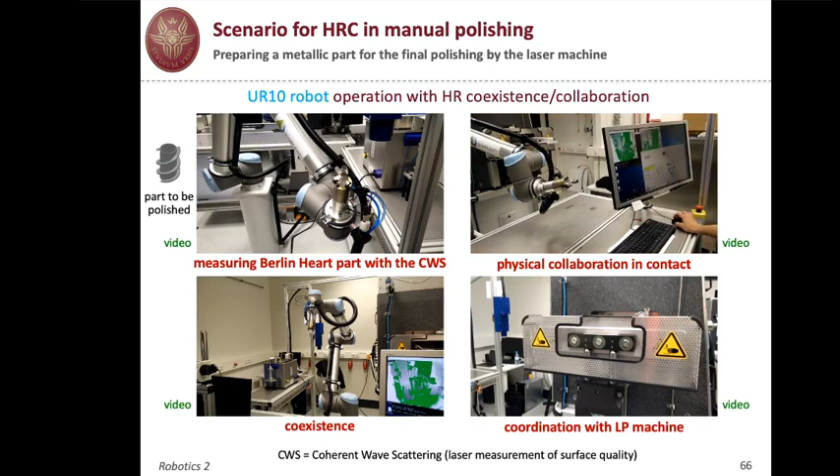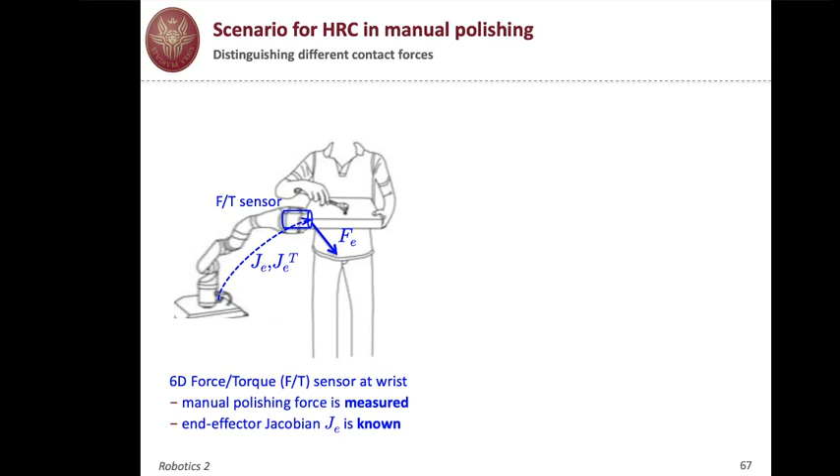So here, let's focus on this physical collaboration. And remember that we have a force-torque sensor mounted on the end effector. So if we apply forces to the part, so polishing forces, we can measure these forces because the part is beyond the 6D force-torque sensor. In particular, this was an ATI force-torque sensor. But on the other hand, if you're pushing the robot before the force-torque sensor, this force is not being measured by this sensor.

And moreover, while contact forces at the end effector have a known Jacobian, the Jacobian of the end effector, for any other contact, not only we don't know the contact force, but we don't know even exactly the contact, so we don't know the Jacobian associated to the contact. However, by using the residual and the force-torque sensor, we can distinguish the different nature of the contact. And now, a little bit of mathematics follows.

First of all, how can we use the force measurement inside the residual computation? So we start from the usual model. On the left-hand side, there are inertial terms, Coriolis and centrifugal terms, gravity term. We neglect for simplicity friction and so on. On the right-hand side, we have the torque applied by the motor at the joint and two types of transformed forces, those applied to the end effector, which are the polishing forces, in a sense, and those coming from the fact that the human may contact the structure in a different point, which is before the force-torque sensor. And these are called F_C, and the contact Jacobian is J_C.

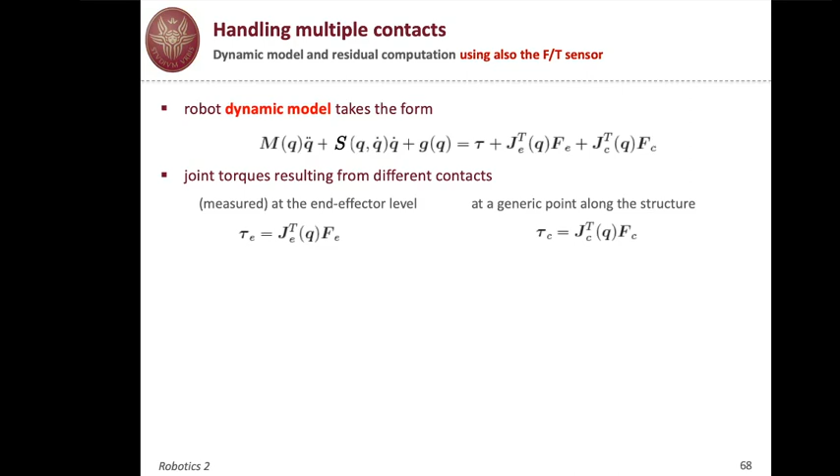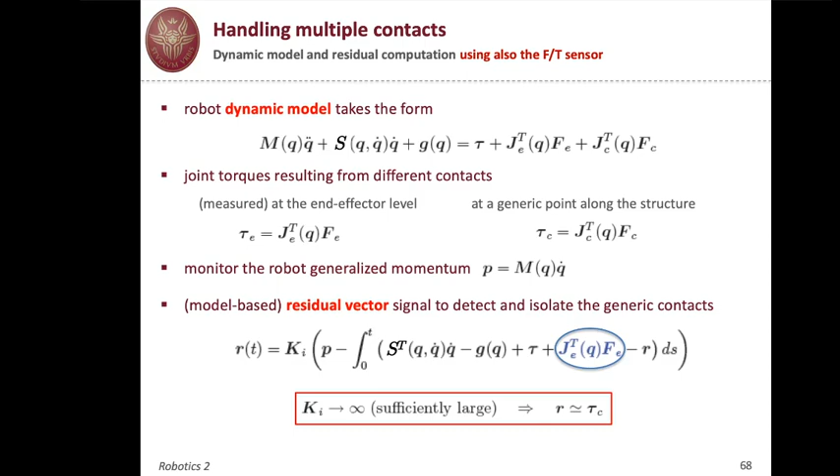So with this in mind, we start by writing the generalized momentum M(q) times q dot, and we build a residual vector, which is exactly the same that we have done for collision detection, but with an extra term. This term is coming from the force-torque measurement. So we can simply plug this in so that the evolution of the residual will only be related to the torque tau_C, which results from J_C transpose F_C, which is the force applied by the human operator along the structure. Now, with this, we have isolated this. What do we do with this tau_C?

And more than that, why should the human operator push on the structure? Okay, so this will be clear from our operation next. But first, let's see how do we control the UR10. Now, the UR10 has no fast research interface. So although we have identified the dynamic model of this robot, we are commanding only velocities. We rely on a low-level controller for the execution of our kinematic command.

So if there is no extra contact being detected, and so the residual is zero, then the robot that is holding the part in front of the human needs to resist any force. Okay, so it should be a very stiff controller, with a large gain K_E, which multiplies the position error and the orientation error, so that the end effector holding the part, despite the presence of forces applied by the human for polishing this part, will stay fixed.

However, if the human is pushing on the robot body, then we decide to relax completely the control on the orientation of the end effector, which means that we just eliminate the orientation part from the Jacobian, so the lower part, or the angular part also called, and we work only with the 3x6 upper part, which is related to the linear motion. And it's a 3x6 matrix for the UR10.

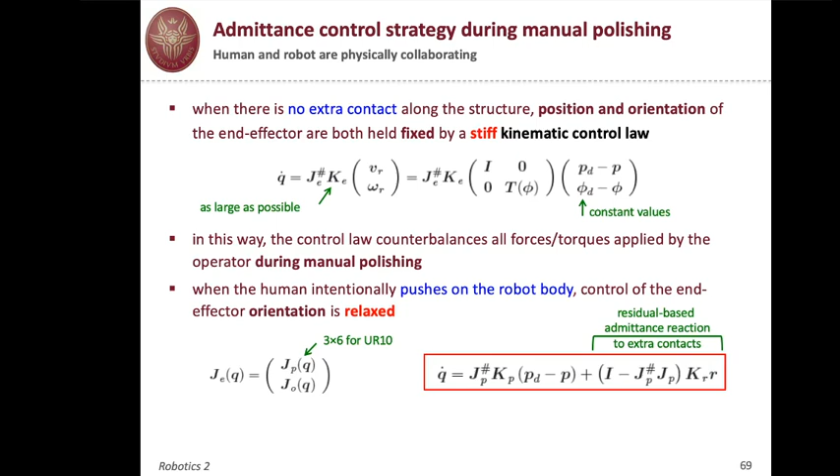So we are commanding a motion which, again, keeps some position fixed with a high gain Kp, but in the null space of this positional task, we'll move the structure in such a way that it follows the applied force or the estimated force at the joint, which is given by the residual R. In this way, the human, by pushing on the body, its final goal is reconfiguring the arm so that the workpiece is oriented in a different way in front of him or her, and so polishing of a different part of the surface of this workpiece can be conducted.

So here we see two possible implementations of this idea. The first one uses no force torque sensor and uses a modality of control available on the safety certified lightweight robot UR10. So in this case, a hand waving is used to activate a collaboration. You can see a Kinect in the background. And now the robot is maintaining its position and orientation because we are mimicking a situation of polishing. Now, if we switch to the free drive mode, we can freely move the end effector, the robot configuration, and so also reorient the final part.

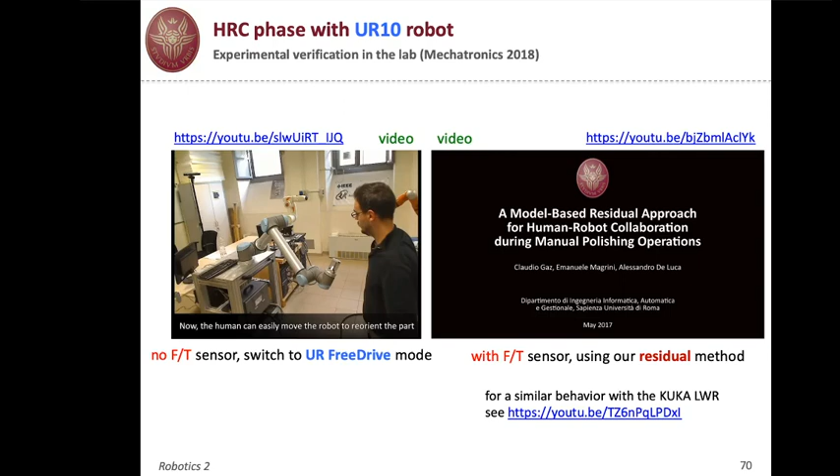But in fact, we do this without keeping a constant position. And this cannot be done at the same time by the UR10 controller. So it's something that we should program from the outside. And in fact, in the second video, which accompanies a paper that we published in Mechatronics in 2018, we will use the force torque sensor and we will use the residual in order to have an estimate of the joint torque resulting from an intentional contact of the operator on the structure of the robot, and accordingly we will reconfigure by keeping position constant.

So here we have put a tool. Now suppose that this is mimicking the polishing task. The robot does not move at all. However, you see that we can push around, the tip of the robot will not move, but the orientation has been changed. And of course, because you can distinguish things, you can apply a force intentionally reconfiguring, but while applying a polishing force at the end effector. And here you see that the robot has been brought in a different configuration and the operation continues as well.

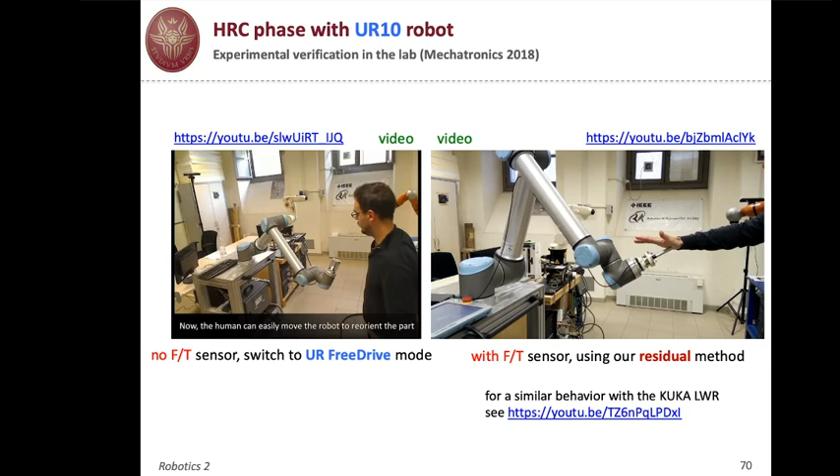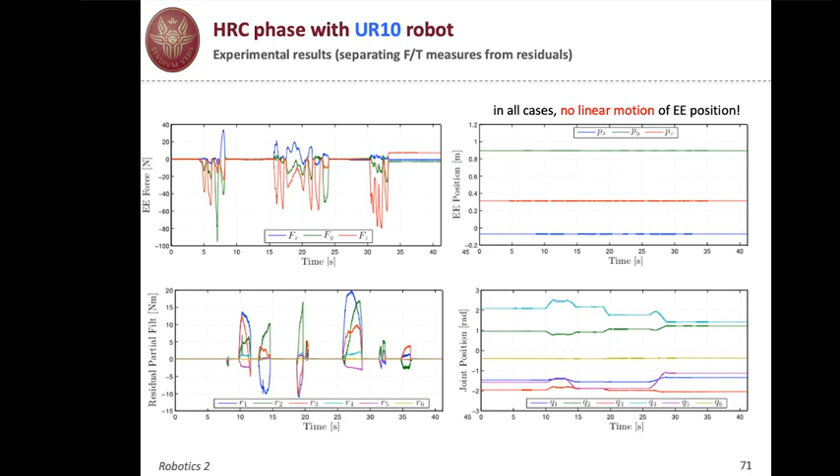Now, and we are close to concluding, this idea of combining force torque information with some form of residual or signal that enables us to estimate the contact has also been applied to the KUKA KR5, which has a closed control architecture. So we cannot command torques, we can only measure current, measure joint angle by the encoder, and every 12 milliseconds give a velocity reference at the joint level.

However, we equipped this robot also with an ATI Mini45 force torque sensor. We have 3 copies of this force sensor in the lab. And now the question is the following. There are intentional contacts or collisions that may occur everywhere. So we have to, let's say, distinguish these. And we have seen that this can be done by filtering the motor currents properly with a high-pass filter and a low-pass filter. We have seen this in the lecture on collision detection and reaction.

But there could also be collaborative forces. So, for instance, the human here, Eleonora Mariotti, has done a master thesis with us. She will do some manual guidance. So she will apply some force, a collaborative force. In fact, this is level 3 in the safety standard, moving the end effector, so applying a force which is intentional, okay?

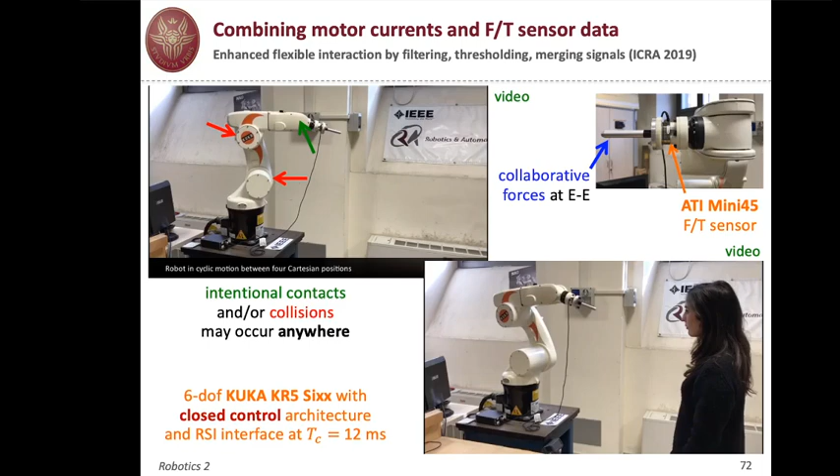So we can use the force torque sensor as we did for the manual polishing task to distinguish between the different types of interaction forces: collaborative, collision, or any other intentional contact before the force torque sensor. So here in the first video, the robot is doing a cyclic motion. Now the force torque sensor feels the force and then the robot abandons the original task and follows the human hand, then recovers the previous one. But if you hit the end effector, so you are filtering also the force torque signal, and if you push against it, then the robot would stop. So this is intended as a collision, even at the collaborative level, on the tip.

And the second video, which is another part of the same video of a paper presented at ICRA 2019, shows that we can also detect and then stop a collision before the force sensor. And the robot stops as long as it senses this extra force along its structure, of course, without any information. Now, this extra force can stop also a collaborative action. So you can move the robot around by holding its nose, with the force torque sensor feeling the contact, and then the robot may hit some object or another part of the human, or another human may come and stop the robot by hand. Then this supersedes the collaborative part, still in the principle of the hierarchy of safety: safety is the most important, then coexistence, then collaboration, in a coherent way.

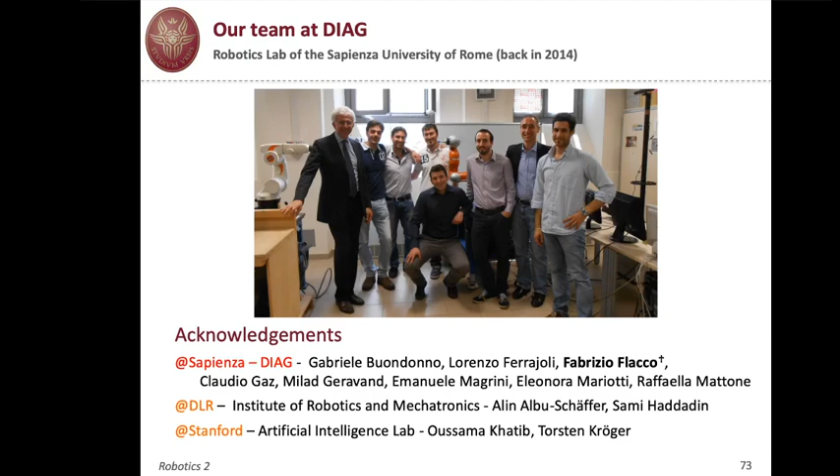Some part of the research has been done in collaboration with DLR, the Institute of Robotics and Mechatronics in the vicinity of Munich, and some activities have been done by Fabrizio during his PhD while staying for a few months at Stanford in the artificial intelligence lab of Oussama Khatib, and I acknowledge this collaboration. The last two slides contain a long list of reference papers that you can download from my personal website, for teaching and personal use only. And some of these papers also received awards. You can refer to these papers in the slide.

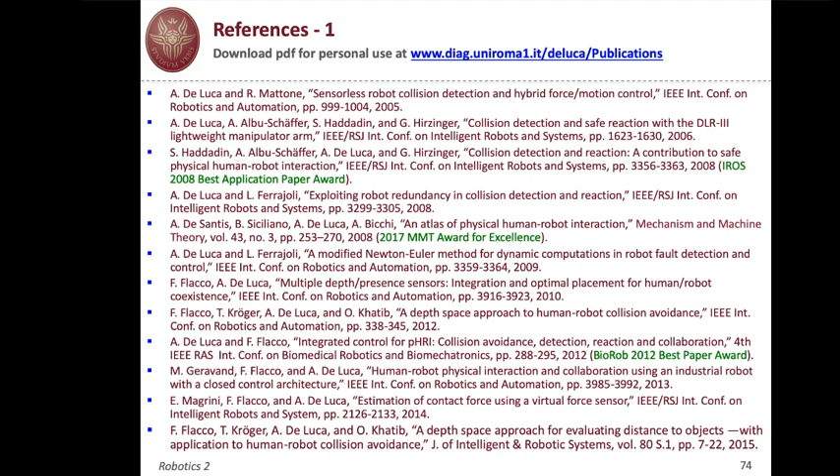For instance, I am referring to a paper presented at IROS in 2008. IROS is the Conference on Intelligent Robots and Systems, so you can match this bibliography with some indication in the slide. And the second page continues. These are listed in temporal order. And if you want to look at the videos, there are video indications all over the place. And there is a playlist called Physical Human Robot Interaction on the YouTube channel of the robotics lab of our department, DIAG, which is the oldest robotics lab of Sapienza, in fact.